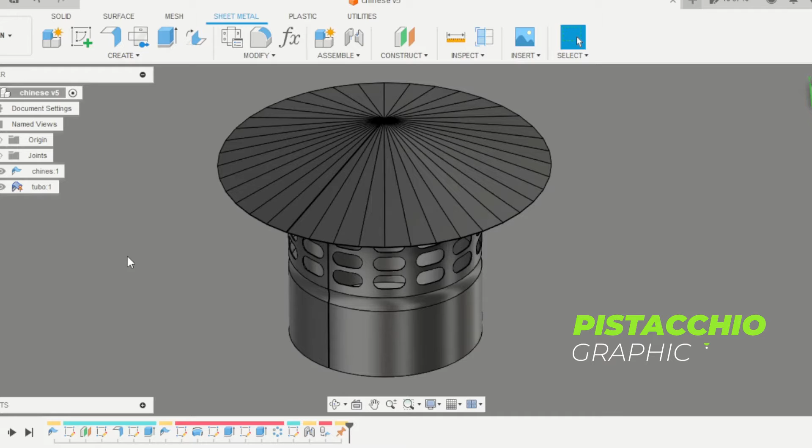This is a chimney Chinese, all made in sheet metal, using lofted flange and flat pattern. I use these drawings I made for this project, the tube and the hat, and you can download this design in the first link of the description. Download the PDF file and follow the instructions here on the video.

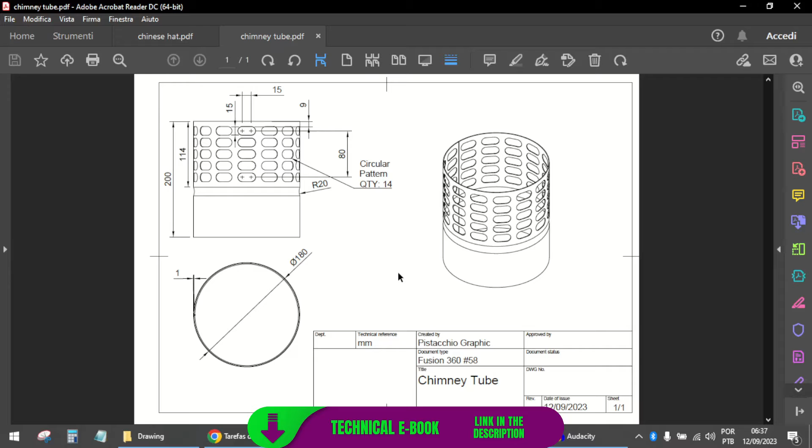Let's start. Open a new design. Create a new component. This is sheet metal. This will be the Chinese hat here.

On the bottom plane, create a circle with 310 millimeters.

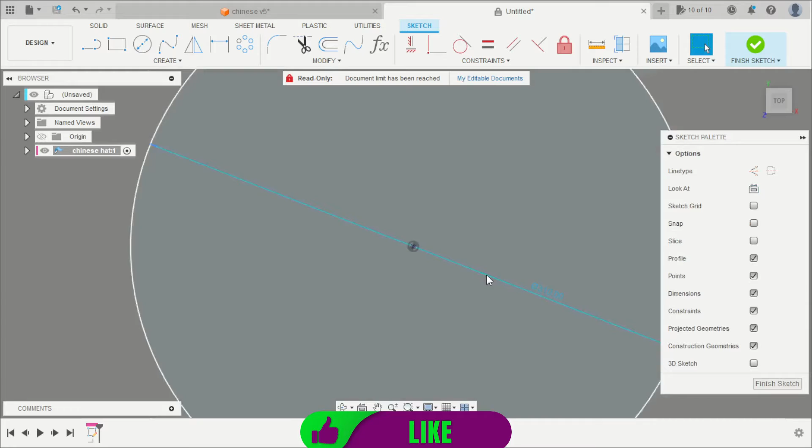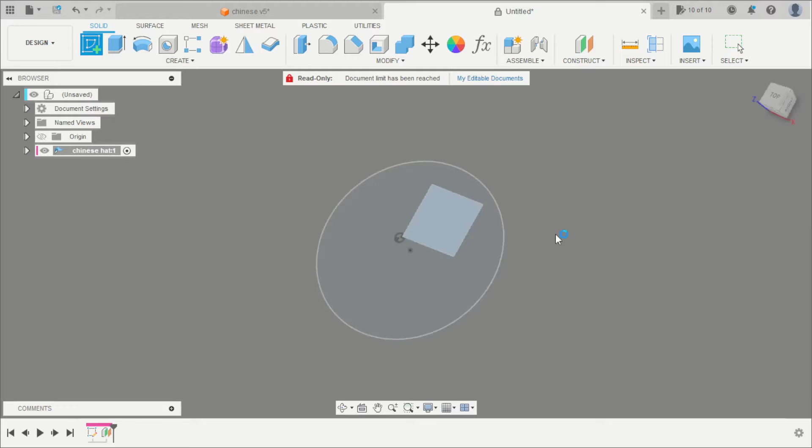We need to create another plane with 50 millimeters distance. Create an offset plane here with 50 millimeters, and another circle here in this new plane with 1 millimeter diameter.

Here in the sheet metal tab, we select the flange tool, change to lofted flange, select the two profiles here and here.

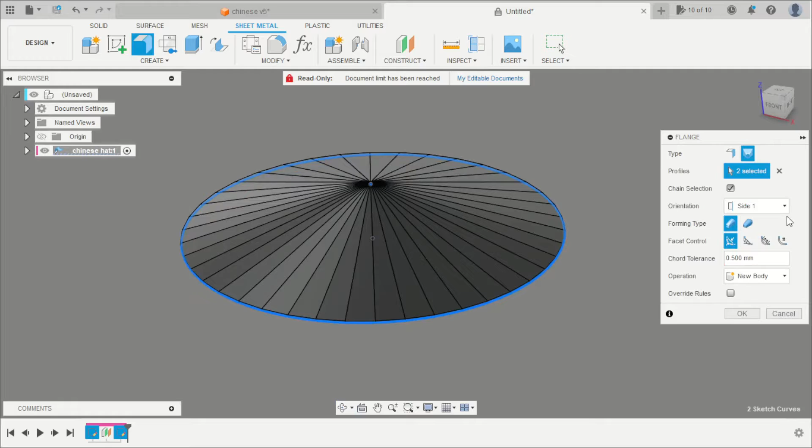For this project, we can leave this configuration with the side, change the orientation of the part. We can leave as side 1, and the chord tolerance for this project is 0.5 millimeters. Click OK.

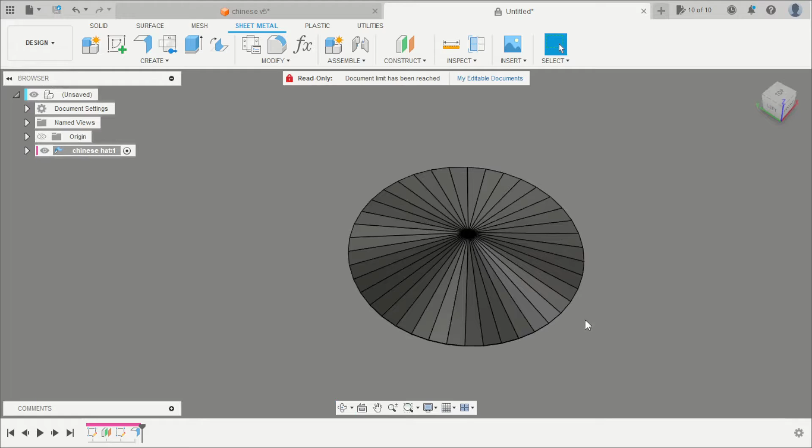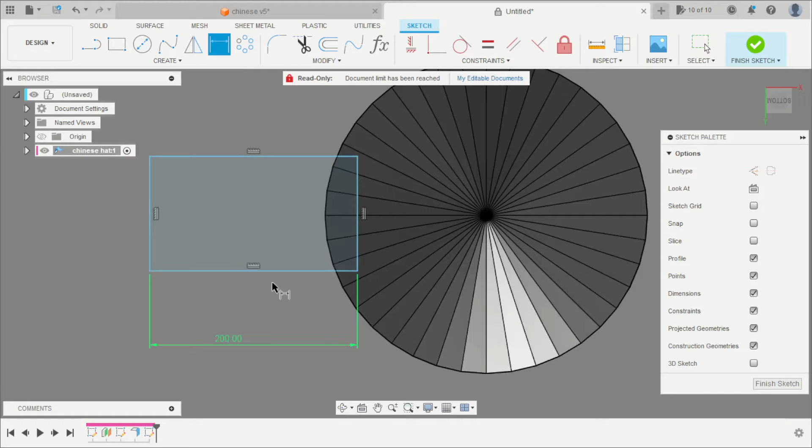So the software can flatten the part, we need to create a gap. Just create a plane here, create a rectangle here and here. This can be 200 millimeters. This midpoint needs to be constrained to the center.

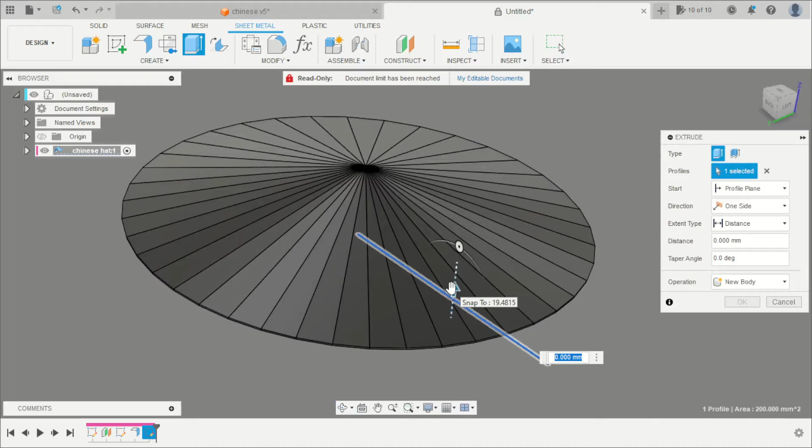And this side 1 millimeter. Finish the sketch. E for extrude, and operation cut.

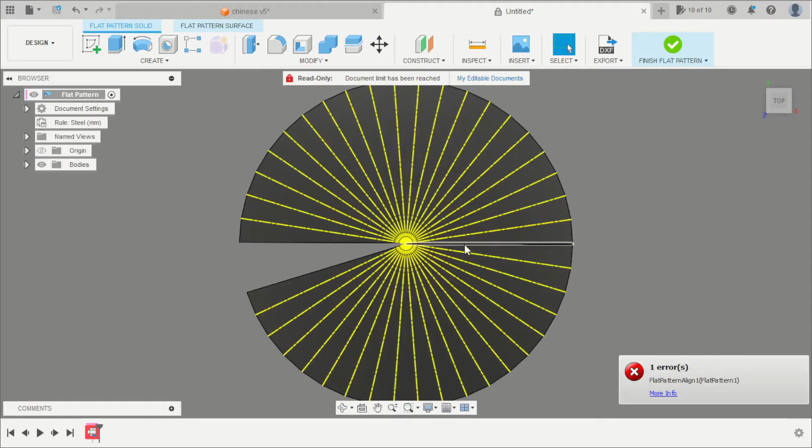Now here we can flatten this part and click OK. And if you need for your project, you can export this DXF file.

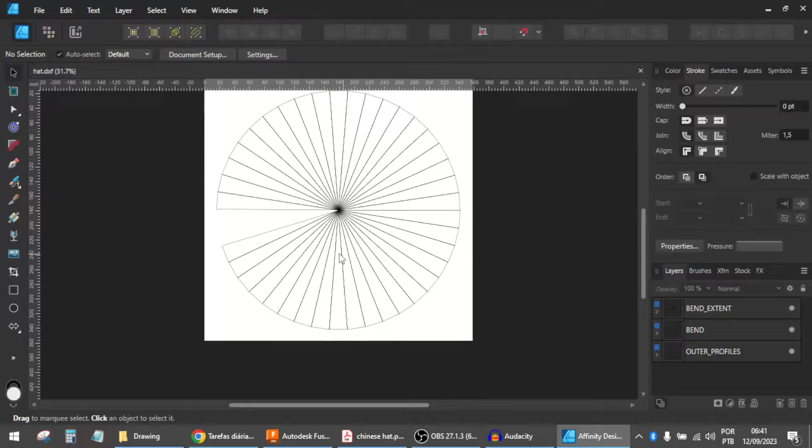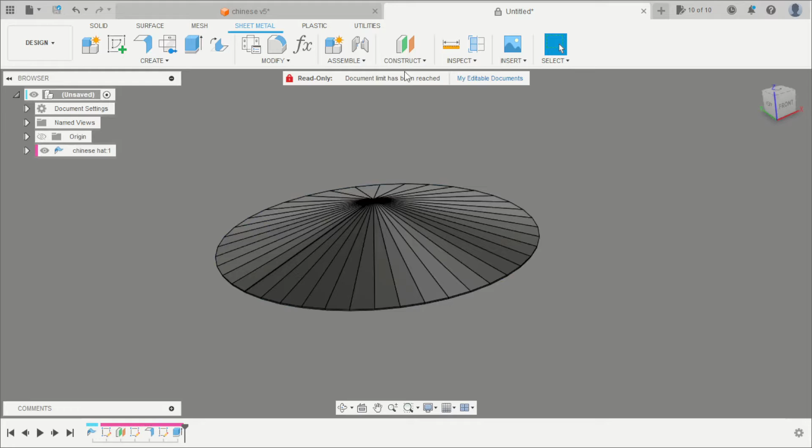Return to Fusion, finish here, return to the main project, and you can change these sheet metal rules here to 1 millimeter. And create another component in the sheet metal as chimney tube.

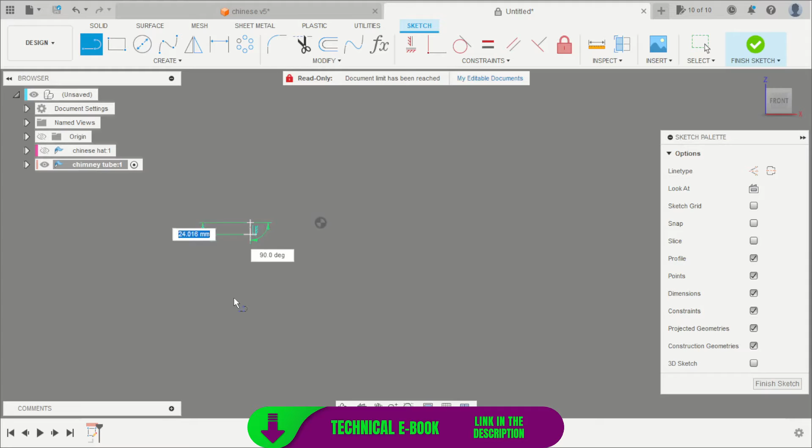Here on the X and Z plane, create a line, another line that we will need to revolve this part, as a center line.

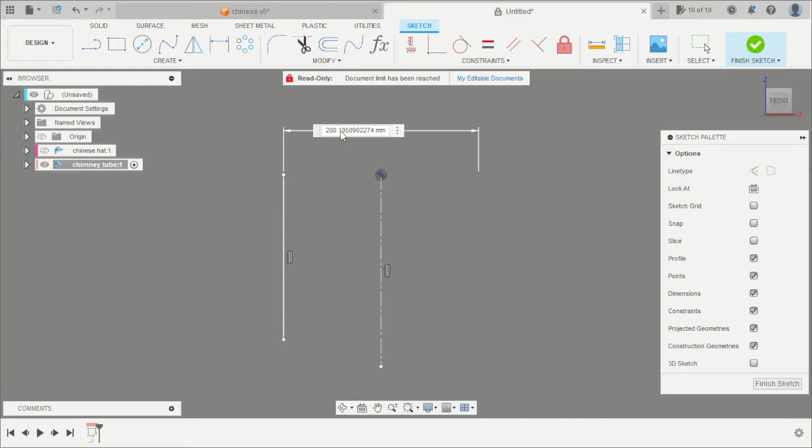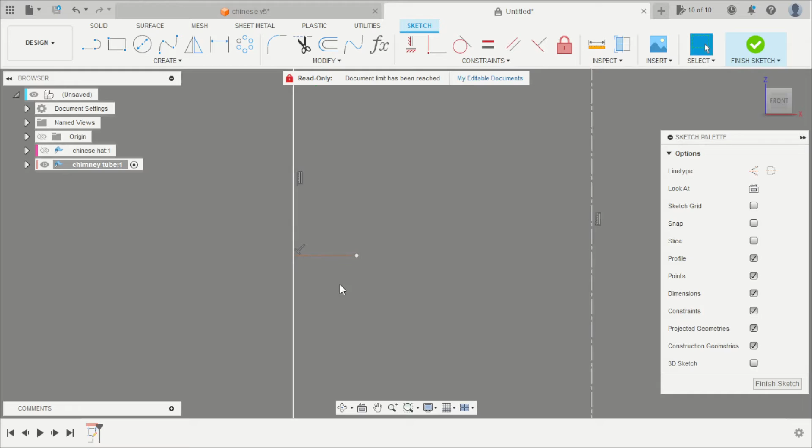280 millimeters, this is the diameter of the tube. These points align horizontal and create another line that needs to be a construction line, an offset of -7.5 millimeters.

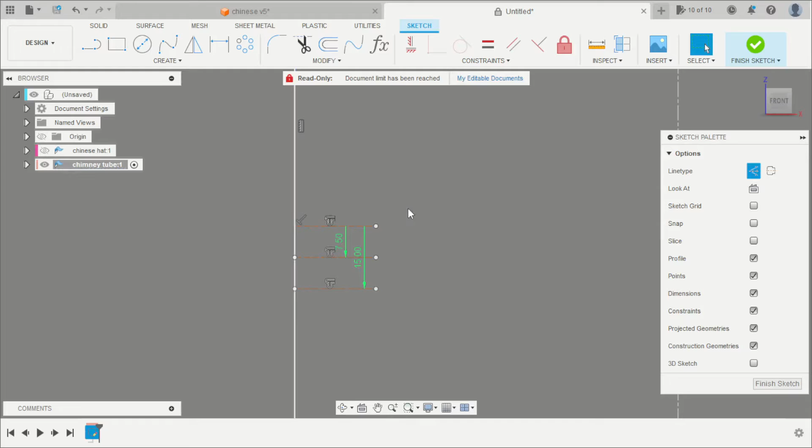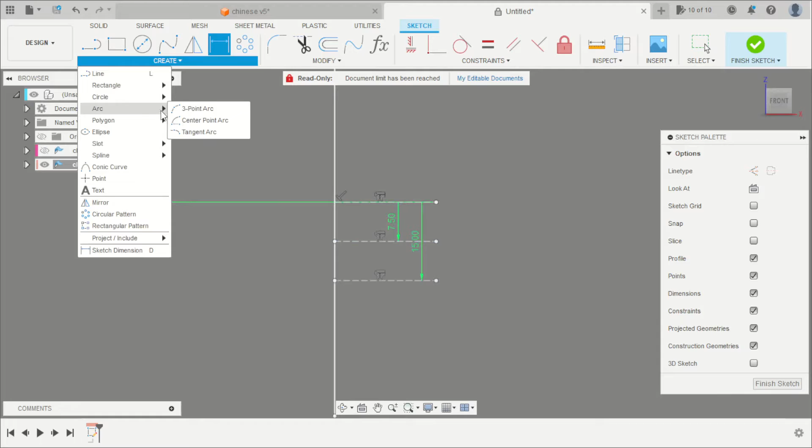Here on the design we have a radius of 20 millimeters. Create a 3-point arc here, here, and here, and a radius of 20 millimeters.

We can cut this and make this distance as 200.

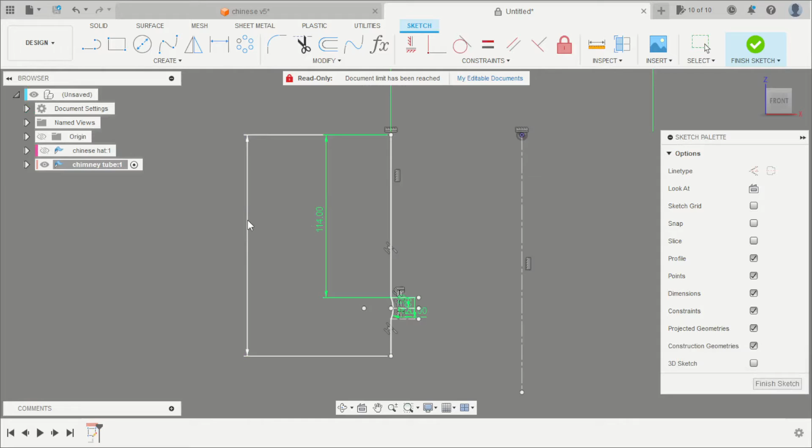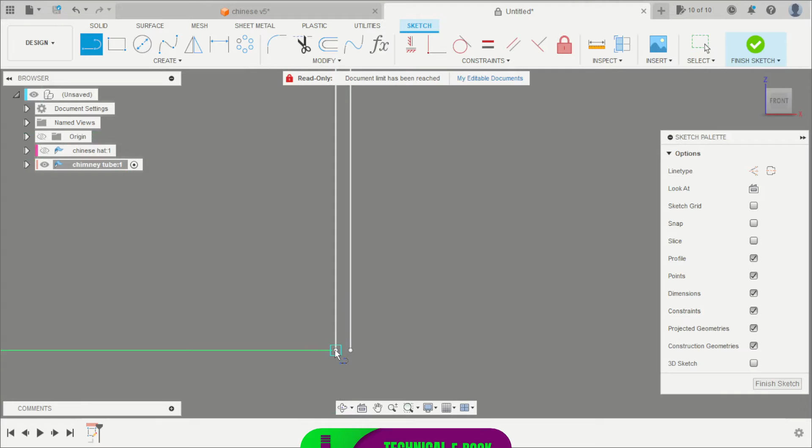Offset using the chain select to the internal part, just 1 millimeter, and close using another line here on the top and here on the bottom. Finish.

Here on the solid tab, select the revolve. The axis will be this line, and click OK.

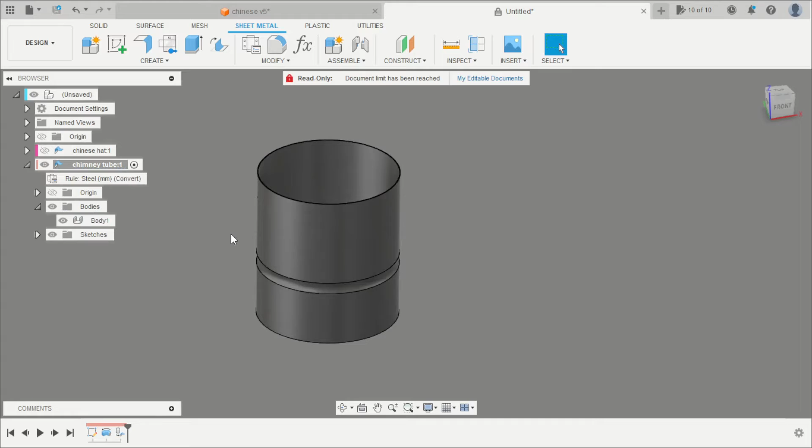When we use a tool here on the solid tab, this creates a solid, but in this case that we need to flatten this part, we need to return here on the sheet metal, create and convert to sheet metal. Select the body and select it here. Now we have a sheet metal and we can flatten this part.

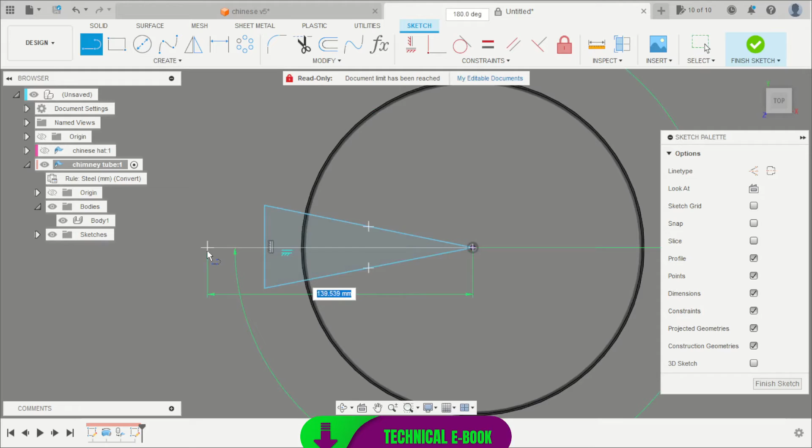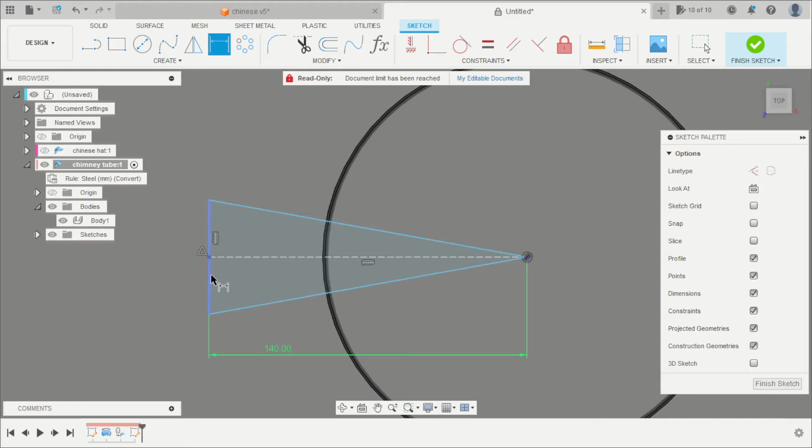For that we need to create a gap. Here and here, another line here horizontally as a construction. This point, hold the shift button and click here on the middle of the line. The distance needs to be bigger than the diameter for this case, and make this 1 millimeter.

Now we can do the same process, return and cut this time.

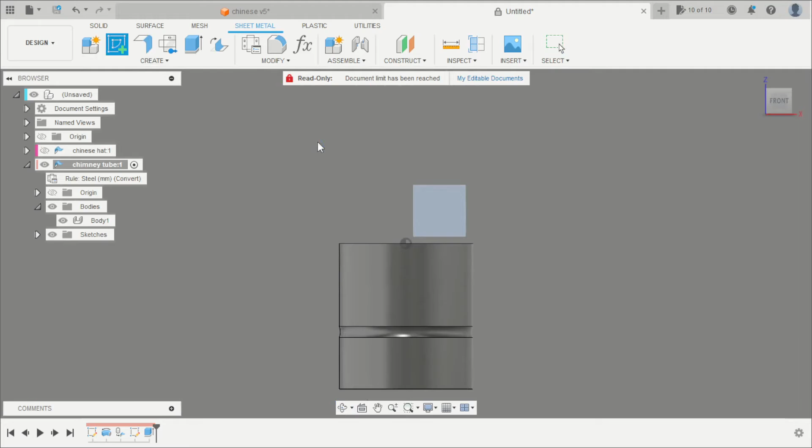Create another sketch and we will create these holes here in the side. We can create these slots to cut this material.

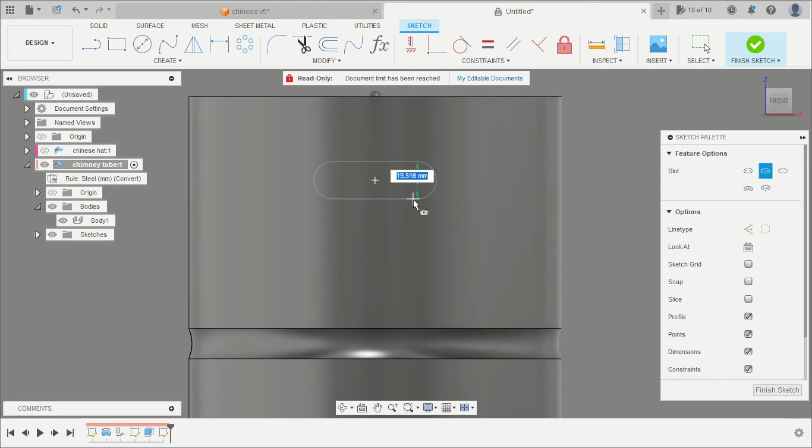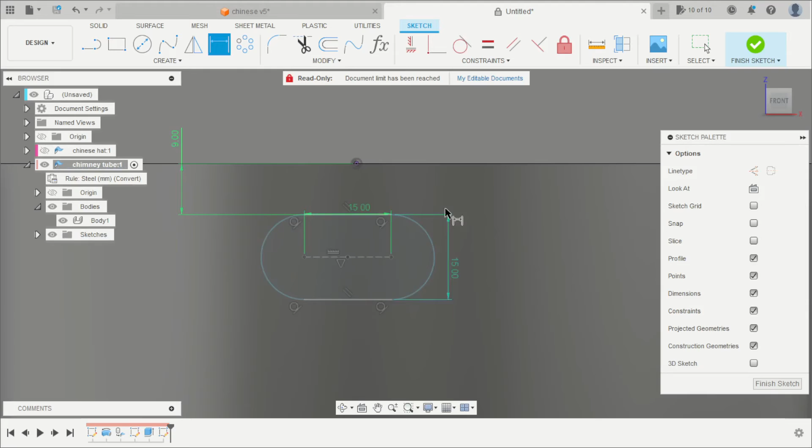Select the slot, center point slot, here, here, and here. The distance is 9 millimeters from the border. Here, 9 millimeters, 15 millimeters, and 15 millimeters. Align that with the center.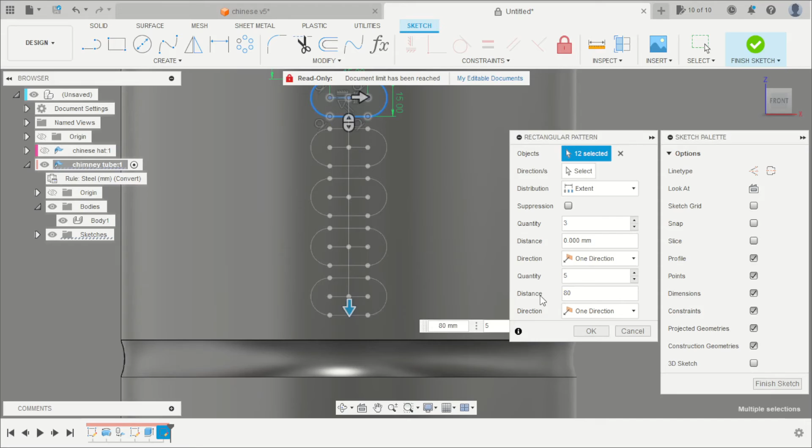And create a rectangular pattern. Select all these lines. The direction will be to the bottom in the vertical. We can create here 5 with 80 millimeter, and the distribution needs to be extent. Click OK. Finish this sketch.

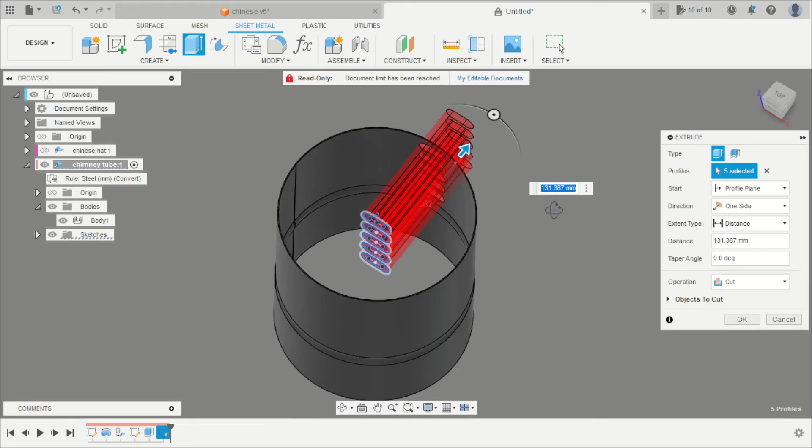E for extrude. Select all the slots here, here, and cut this material. Now we need to revolve.

Return here to solid, circular pattern. The feature we need to select is this extrude. The axis will be the Z axis. The quantity is 14.

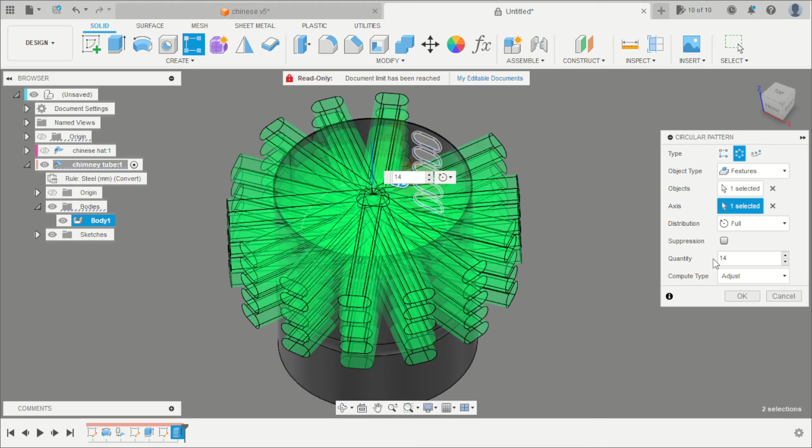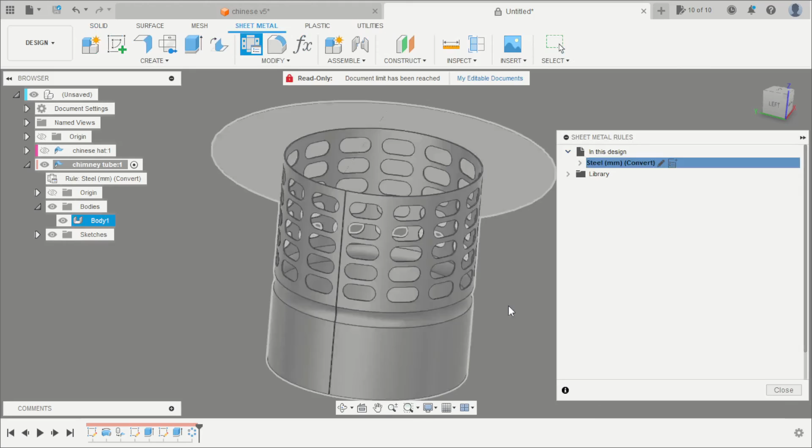Change to optimize and click OK. Now we can, here on the sheet metal, we can create a flat pattern here.

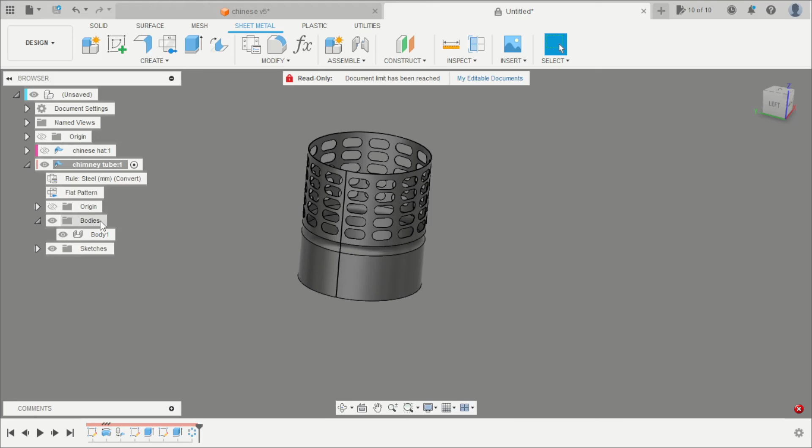The same process, we can need to export as DXF file. Return to the main project. Here on the Chinese hat, return to this project.

We can create a sketch here on the bottom. Just a circle, we don't need measurements here. Just to facilitate the assembly.

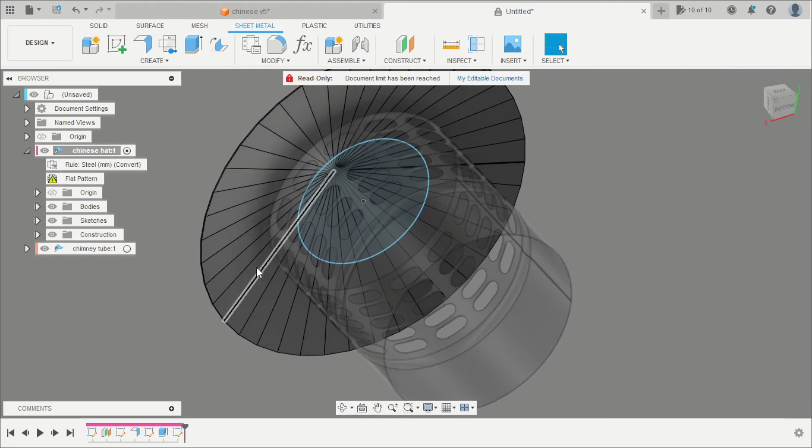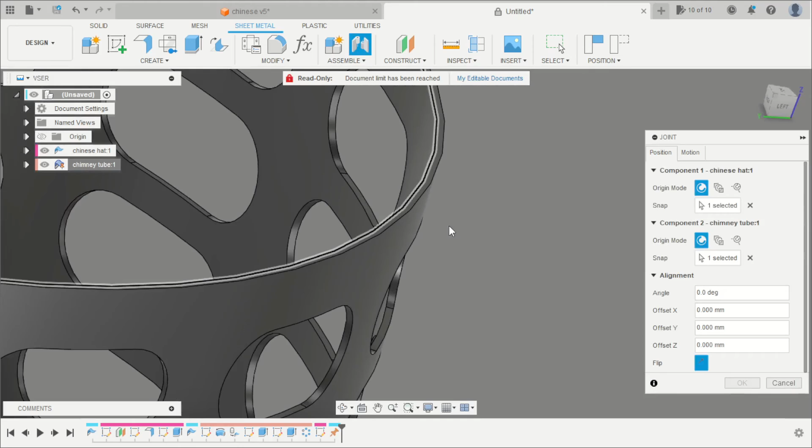Return to the main project. The chimney tube needs to be grounded here. J, select this circle and this border, and change the Z offset to 31 millimeters.

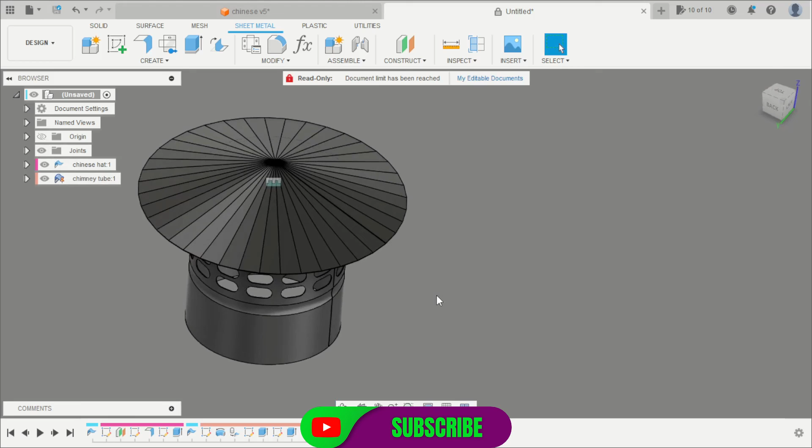Okay, and return here and hide the sketch. You can cut this in a laser or a plasma cutter.